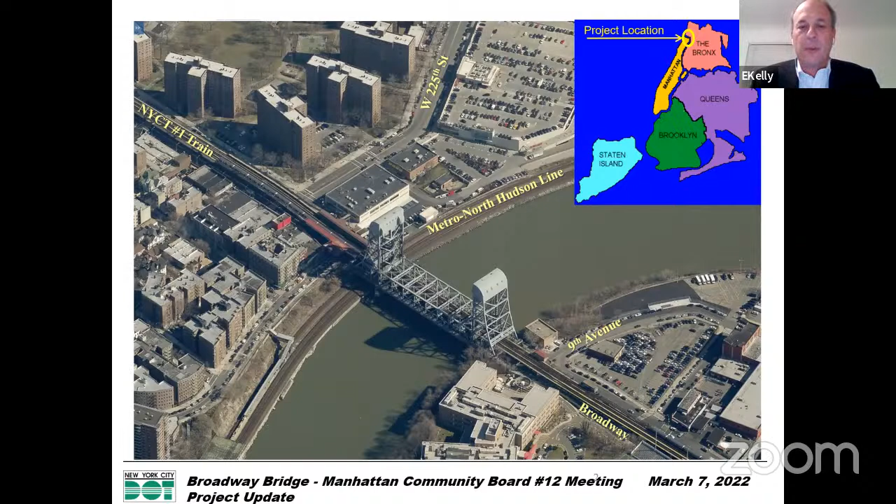The Broadway Bridge itself is a 3-span bridge. The middle span, span 2, is a vertical lift span that raises to provide 134 feet of clear height for marine vessels to pass underneath. Spans 1 and 3 are the tower spans, which support and guide the lift span during operation. This is a double-decker bridge carrying New York City Transit on the upper level above the roadway, while Metro North passes underneath span 3 with 3 tracks of its Hudson line.

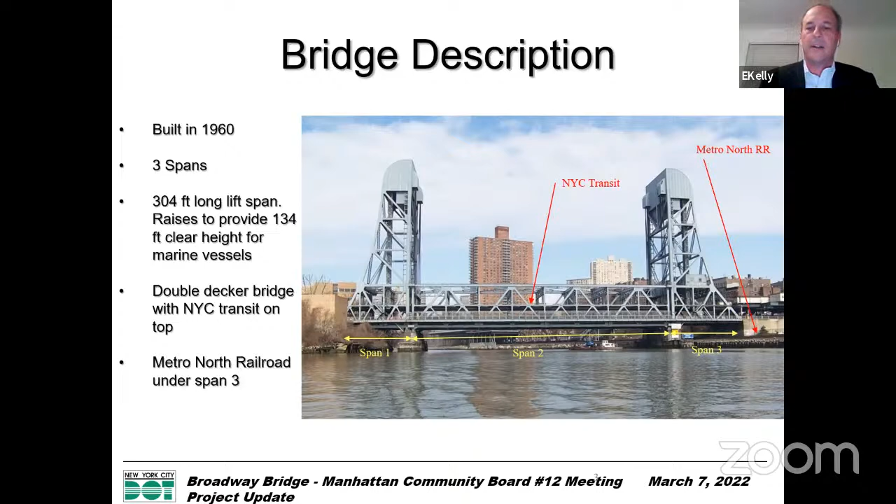The bridge was built in 1960 and is currently being rehabilitated. The existing roadway conditions have 2 travel lanes and a shoulder on the southbound side, and 3 travel lanes northbound, with 2 sidewalks, one located on each side of the bridge.

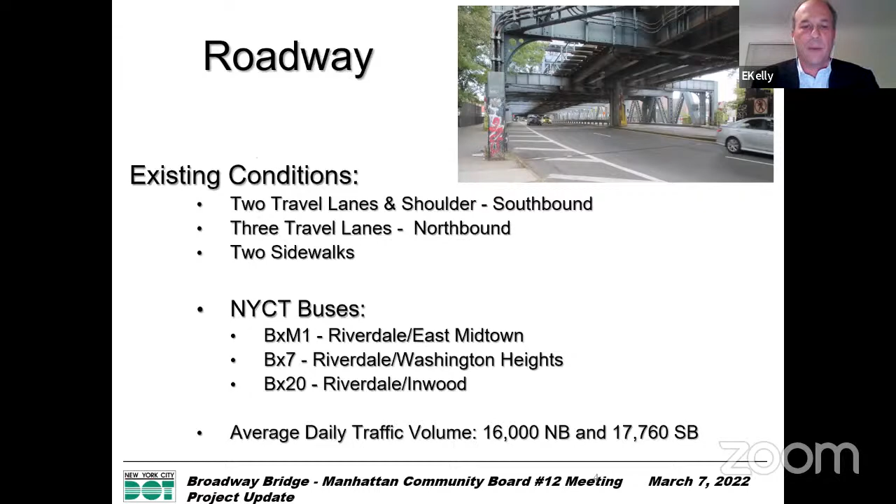It's a relatively busy bridge and carries a number of New York City Transit buses that utilize it for their routes. As mentioned, it also carries the number 1 train above the roadway. There are 3 tracks, with generally a train every 10 minutes on average, though it lessens a bit in the late evenings and before rush hour.

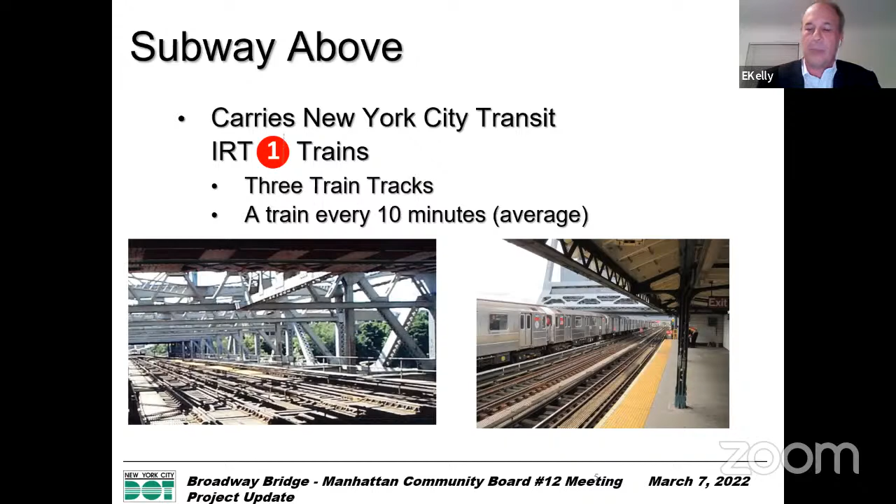The bridge is being reconstructed at this time. There is construction going on. Some of the things you might be seeing consist of flag repairs or deficiencies being worked on, including repairs to the open grating, pothole repair in the roadway, as well as railing repairs. We've also heard concerns and installed a cover plate over the expansion joint in the roadway for bicyclists.

Some things you might not be seeing that have also been going on are substructure repairs. These have been completed except for the north abutment, because we're in ongoing coordination with Metro North for scheduling of the work during their train interruptions, as well as the use of flagmen. So that work is still ongoing and being coordinated.

I don't know if you've looked up to the very top of the towers, but on the south tower, on the east side, we've installed a falcon refuge. This has been at the request of both the New York State DEC and New York City DEP. This nest is a safe refuge for the falcons. As part of that work, a walkway has also been installed to allow the DEC to monitor and track the falcons during nesting, as well as do a wellness check on their offspring and see how things are proceeding.

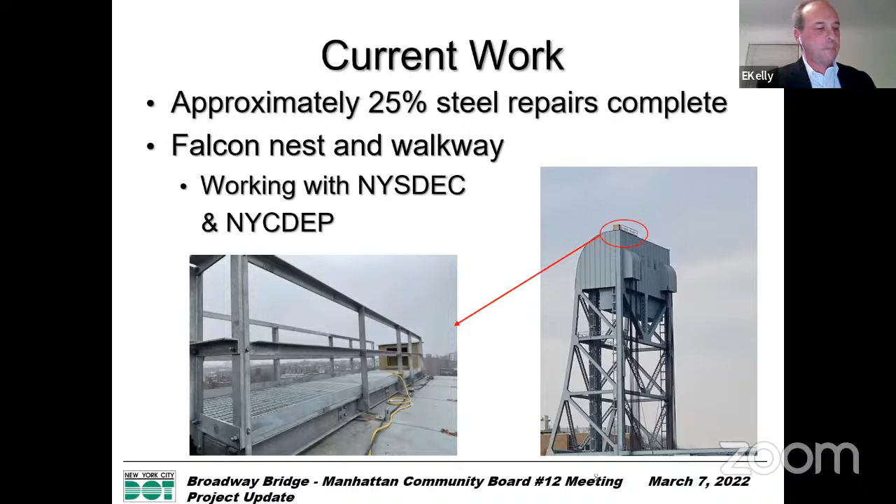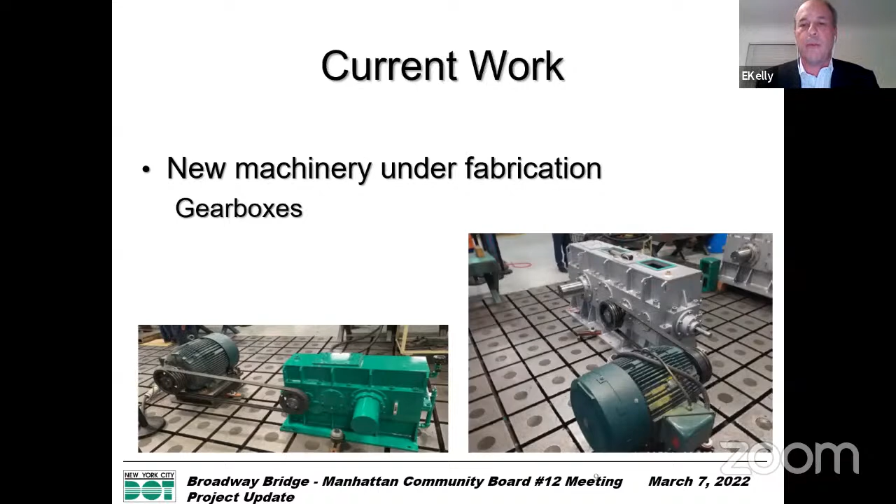Part of the rehabilitation is also to replace portions of the machinery that allows this bridge to raise and lower. Right now the machinery is under fabrication. These are two pictures of two gearboxes that will be used on the bridge, operating certain parts of the machinery to allow the bridge to open to marine traffic. These photos show these reducers being tested for their performance to make sure they meet contract requirements.

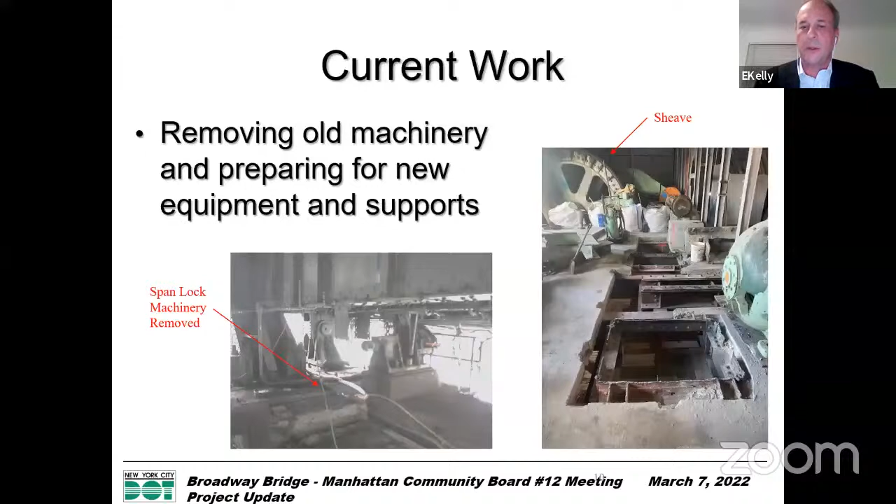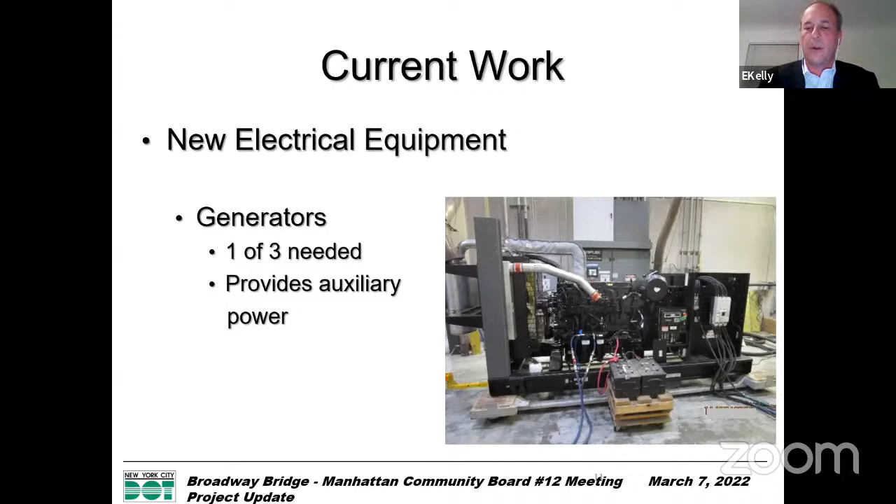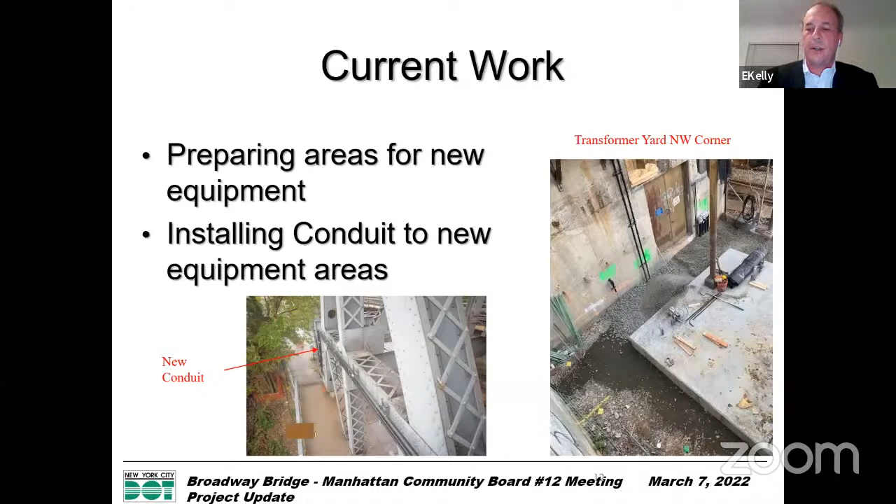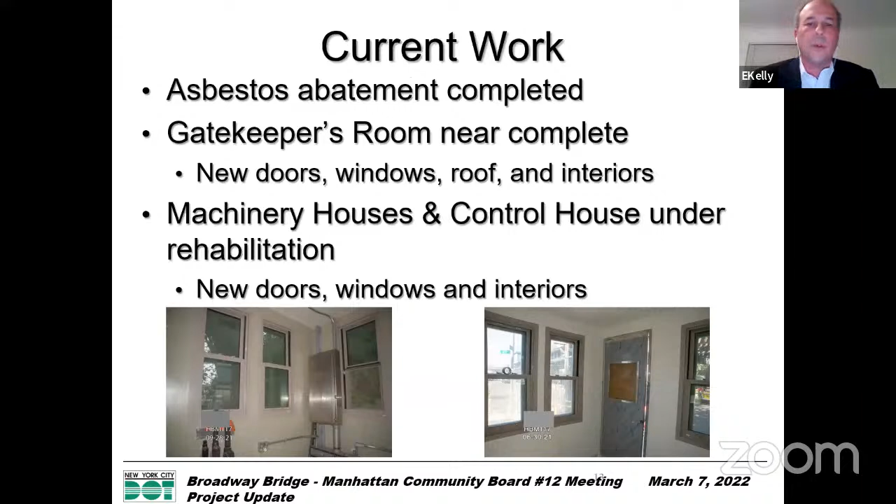The electrical system is a vital portion of the bridge and is critical in making sure the bridge is operating. To allow the 2 sides of the 2 towers to work together, we have to have wiring that crosses the Harlem River. This wiring is currently designed as through droop cables, connected to the tower and then onto the lift span, allowing the wiring to go up through the droop cable and across the lift span to the next tower. These are the control wires that allow the bridge to have communication on either side of the Harlem River during an operation. Because of the size of the bridge, we needed to provide 2 separate electric services on each side of the Harlem River to try to minimize the amount of droop cables being installed.

One of the situations we've been looking to do is reuse the existing ducts or pipes that go underneath the Harlem River. These ducts go from the South Pier under the river to the North Pier, and we thought it would be a possible option. These cables inside the ducts are 60 years old, and we tried in 2 full days of effort to pull one of the cables out of the pipe. Unfortunately, it was unsuccessful.

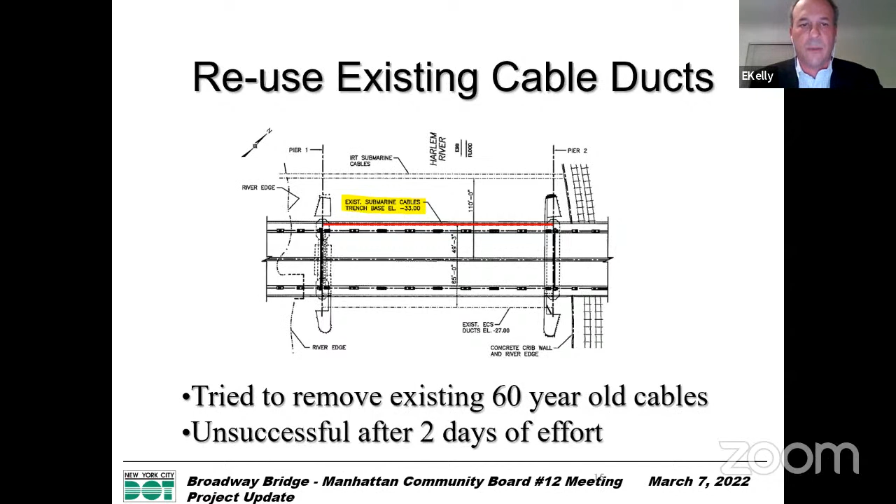The reason I'm bringing this up is the use of aerial cables is being considered to eliminate the South Electric service. We're doing all we can to keep the droop cables to a minimum size and quantity. We're also looking at other methods regarding the appearance and quantity of these aerial cables, in an effort to not make them as obvious.

And with that, I would like to turn it back over to Jonine. Thank you, Eric, I appreciate that. Just before we get to the questions, I wanted to go back a little bit onto the aerial cable.

Jonine, hello? Sorry to interrupt you, Oscar. I think Yana left and tried to get back in. If she could be let in again. She's trying to. Oh, thank you. Oscar, sorry, I think she's been waiting outside again. Oh, thank you, Oscar, thank you. Hopefully, I want to be sure that everyone has a chance to see her. She's the face that goes with the name on all the material we send out.

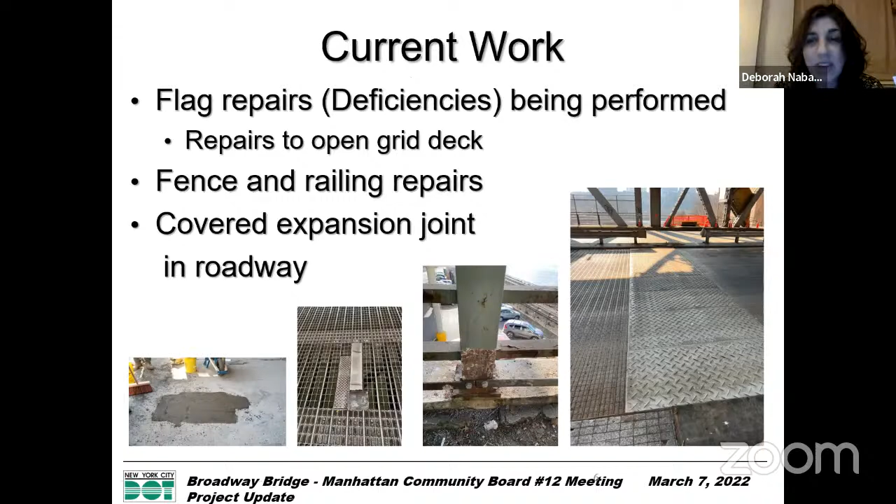Those were the two major points we wanted to make for you tonight, and hopefully we can answer whatever questions you have. Deborah, I don't know if you'll be emceeing that portion, since I'm afraid I'll say someone's name incorrectly. No, I will MC that portion. Thank you so much for that. This was a great and complete overview.

My question is, when is this expected to be completed? And if you could give an overview of, from when you first presented it—I wasn't on the committee during 2019, but I think during that time something was identified, so we knew there was going to be time added to the timeline. Could you say what the original timeline was and what the new timeline is, with a sidebar on how much you're being held up by the negotiation with Metro North about safely doing the work on the north side.

I'll start with the last point first to make sure I remember it. The issue with Metro North is not the critical factor at this point. We do have routine conversations with Metro North, and comparing Metro North to Amtrak, Metro North is an easier partner to work with. I don't see the Metro North issues as really impacting the schedule greatly at this point. Dennis will correct me if I'm wrong. It's just an ongoing thing.